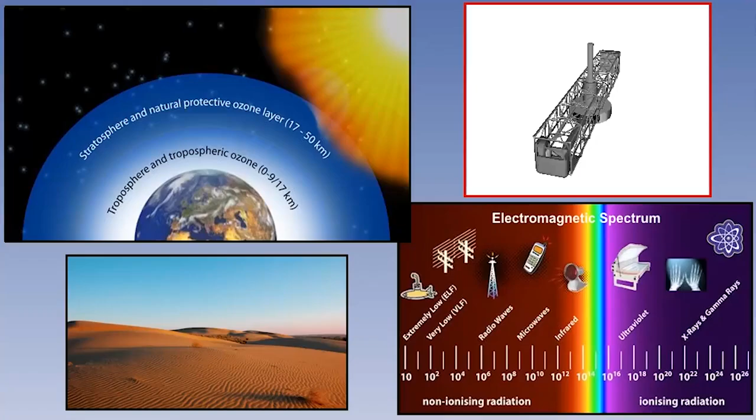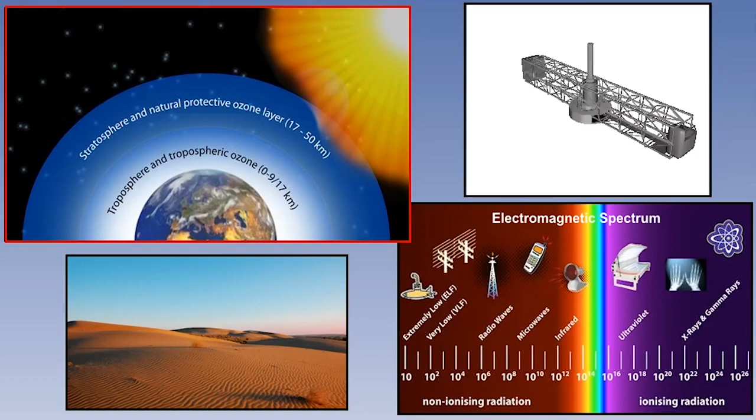In this lesson on physical stress, we will look at some external factors that may affect the performance of a pilot. These factors are acceleration or g-forces, the high altitude effects of ozone, radiation, humidity, and extreme temperatures.

Acceleration is the rate of change in velocity, either as regards speed or direction or both. The change of speed can be from stationary or an existing movement. The formula for acceleration need not be learnt, but it is given by way of explanation. Acceleration can be linear, with movement in a straight line without gaining or losing height, and measured in meters per second squared. Angular acceleration is the rate of change of angular velocity.

When a ball rotates on a string, there is a force applied to the string which keeps the ball moving in a circle. If the string breaks, and this force is removed, the ball will not continue in a circle, but will move in a straight line. This force, which maintains the circular movement, is radial or centripetal force. The amount of force required is W times V squared divided by R times G, where W is weight, V is velocity, R is radius, and G is gravity. This means that if you double the speed, 4 times the force is required to maintain the angle of turn.

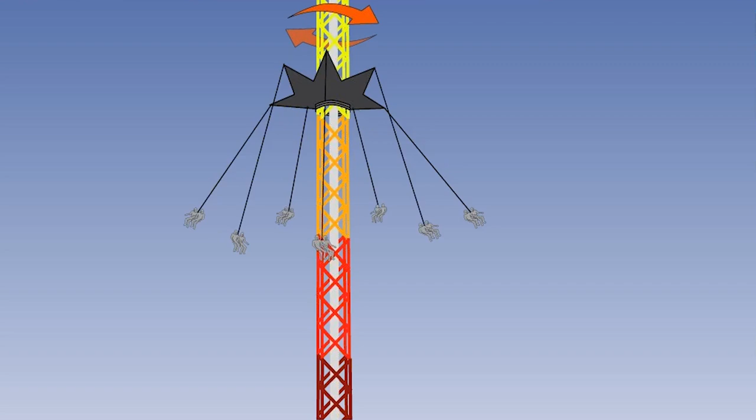Reference is frequently made to centrifugal force, as a force which pushes one away from the center of a circle, as on a fairground ride. But centrifugal force is a misnomer. It is not a force, but rather the reaction to a centripetal force. You will recall that Newton's third law states that every action has a reaction. The reaction to centripetal force is centrifugal force. If you swing a jam jar full of water in a circle fast enough, the water will not fall out because you are providing the required centripetal force.

Acceleration in the fore and aft plane, that is, linear or horizontal acceleration, is given the notation gx. In the lateral plane, it is called gy, and in the vertical plane, gz. Acceleration forces are regarded as either of short duration, being less than a second, as in a crash, or of long duration, as in a turn. Acceleration is measured in multiples of standard gravitational force g.

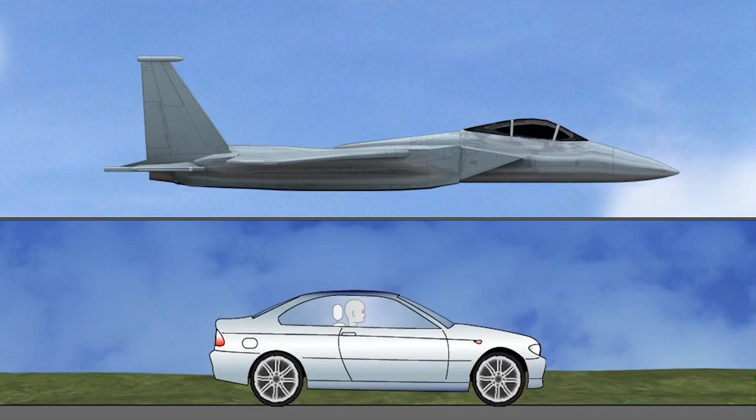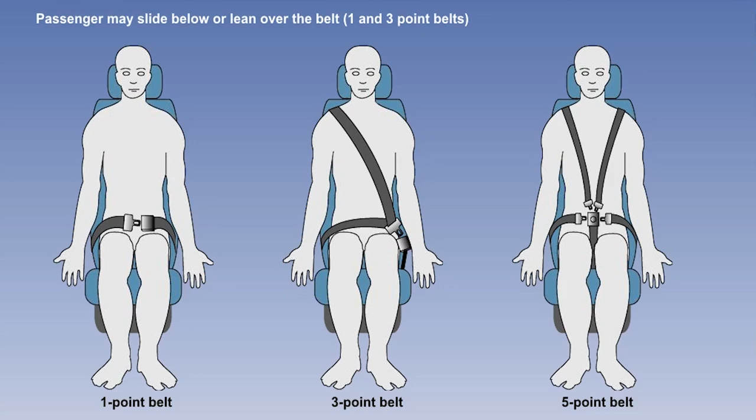Short duration g-forces are concerned with impacts, and a body can withstand up to 25 g in the vertical axis and 45 g in the fore and aft axis. Forces above these values will cause injury. Seatbelts will reduce impact injuries, but can themselves be a cause of injury, as the passenger may slide below or lean over the belt. Multiple point belts are by far the best, but they are not found in passenger aircraft, at least not for the passengers.

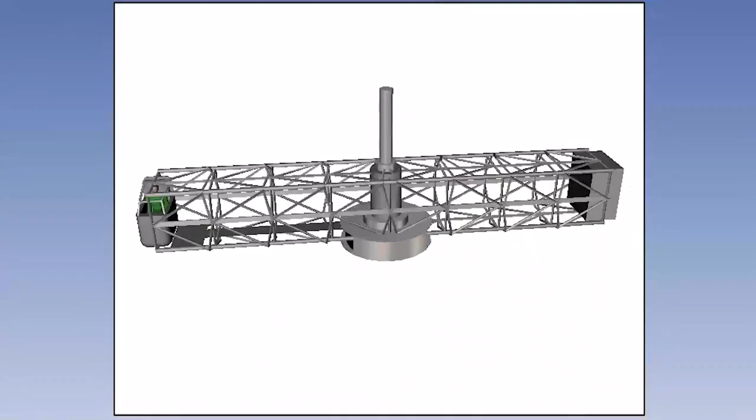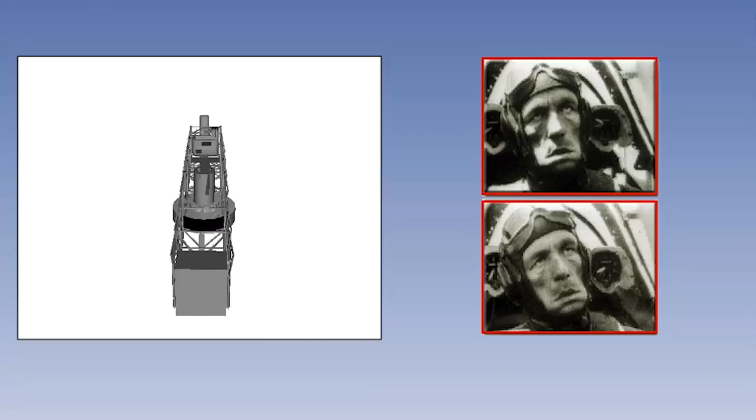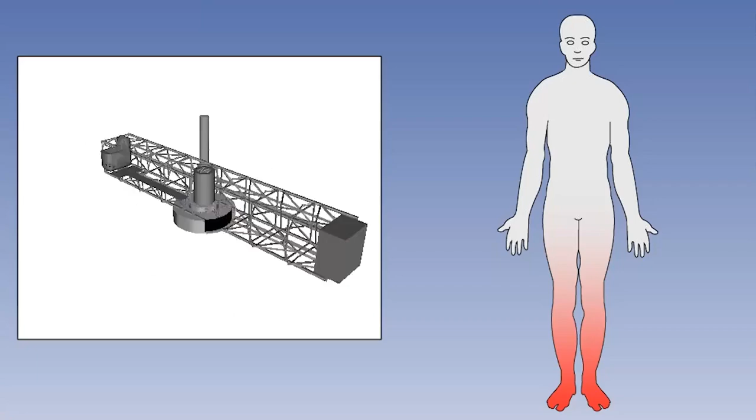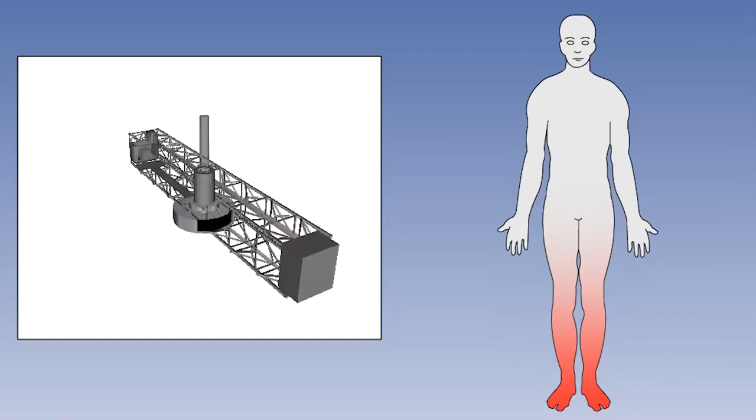Both forms of acceleration, linear or angular, will have an effect on the body. At 2g acceleration, movement becomes more difficult. At 2.5 g, it is impossible to rise from a sitting position. At 3 to 4 g, the internal organs are displaced downwards, and the face feels pulled down, while between 4 to 5 g, breathing is difficult because of the lowering of the diaphragm. There is naturally a difference in blood pressure between the lower limbs and the heart, known as hydrostatic variation. This increases with g and results in pooling of the blood in the lower limbs, depriving the brain of blood and therefore oxygen.

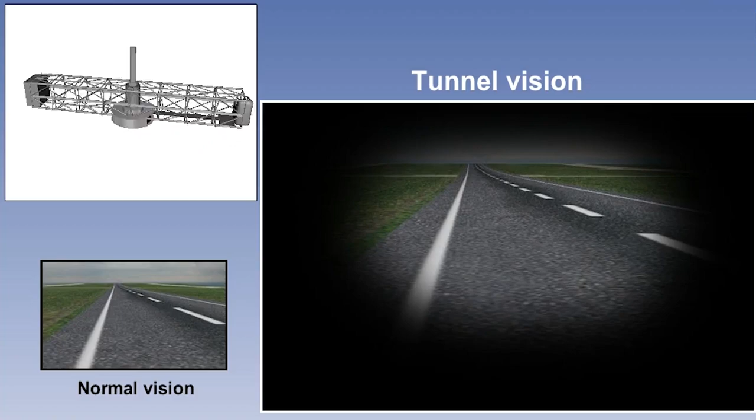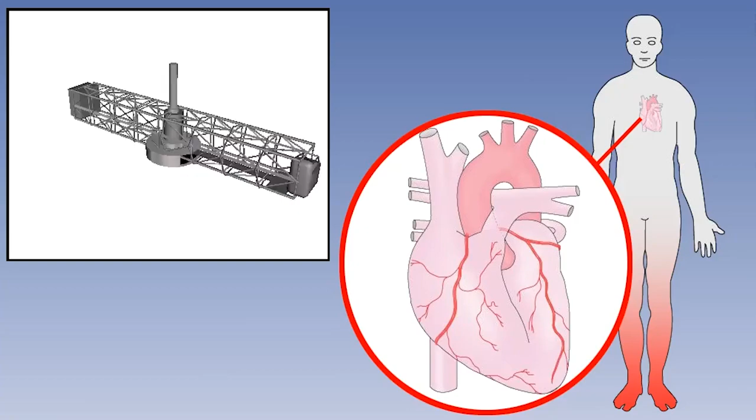The eyes need a great deal of oxygen, and at 3 to 4 g, vision is affected and consciousness reduced. This is known as grey-out. There is also a tunnelling of vision as the outermost cells of the retina, which sense peripheral vision, suffer first. At 5G, the individual loses consciousness, known as blackout, but he will regain consciousness very quickly as G returns to normal. At very high G forces, sensory functions are lost, hemorrhages can occur about the legs, and ultimately death will occur due to the lack of venous return to the heart.

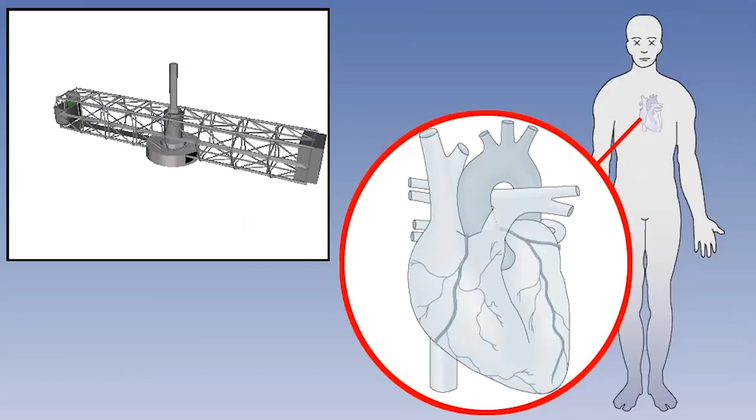When there is negative G, for example during inverted flight, blood is forced into the head. The body can less easily withstand this and is tolerant only up to about -3G. Symptoms are difficulty in breathing, a slowing of the heart, facial pain as veins swell, and red out of the eyes as the lower eyelid is pushed up. With high negative G, the blood vessels in the face and eyes may burst. The ability to withstand even moderate G forces is reduced by the items on this list, all of which reduce the blood's oxygen saturation level.

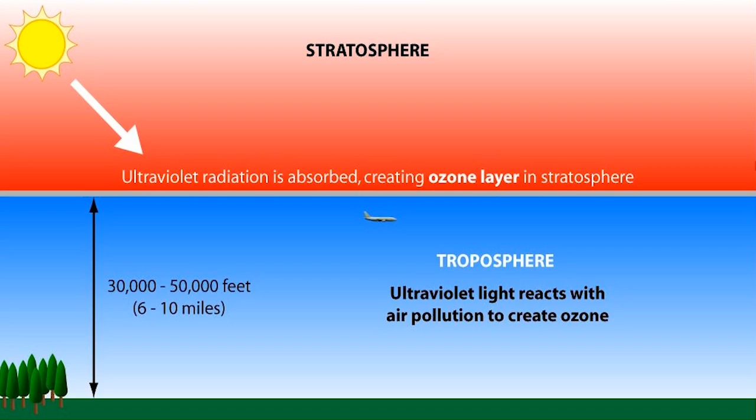An environmental factor to affect a pilot's health is the gas ozone. Ozone, O3, is a triple molecule and therefore an unstable gas, created by the effect of ultraviolet light from the sun on oxygen in the stratosphere. It can also be caused by the effect of ultraviolet light on some pollutants near the Earth's surface. Ozone is bluish in color if concentrated, and is responsible for the blue color of the sky. It has a distinctive, fresh odor in concentrations of more than 0.036 parts per million.

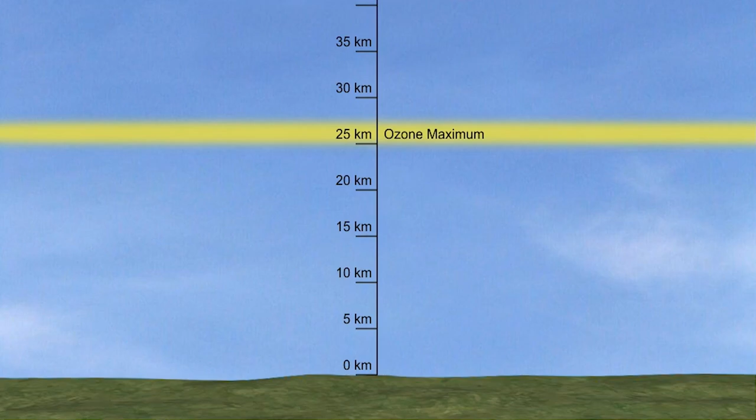It is found in increasing amounts with altitude, from about 8 to 50 kilometers, with the greatest concentration at about 25 kilometers. This is called the ozone layer, and is relevant to those flying at 35,000 feet and above, as some ozone will be drawn into the aircraft from outside. Ozone is a toxic gas that primarily affects the respiratory system. Those who have experienced ozone sickness state that they were unaware of any odor.

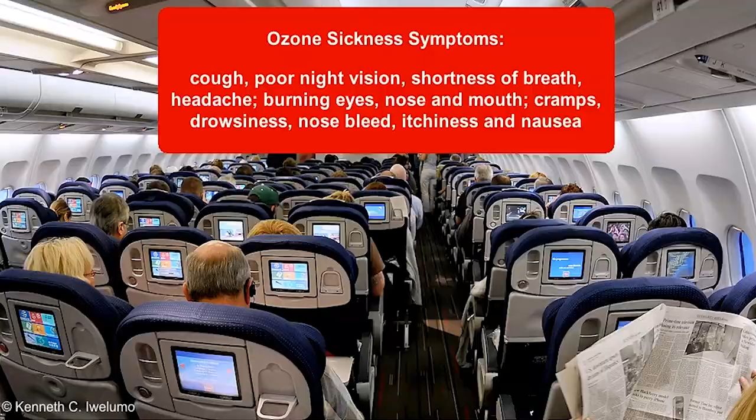The symptoms are a cough, poor night vision, shortness of breath, headache, burning eyes, nose and mouth, cramps, drowsiness, nosebleed, itchiness, and nausea. Most passenger aircraft incorporate scrubbing devices to restrict the ingress of ozone into the cabin. Some relief from the effects of ozone inhalation can be had from breathing through a warm, moist towel, as ozone is water-soluble and reverts to oxygen at higher temperatures. Breathing pure oxygen and limiting physical activity also assists.